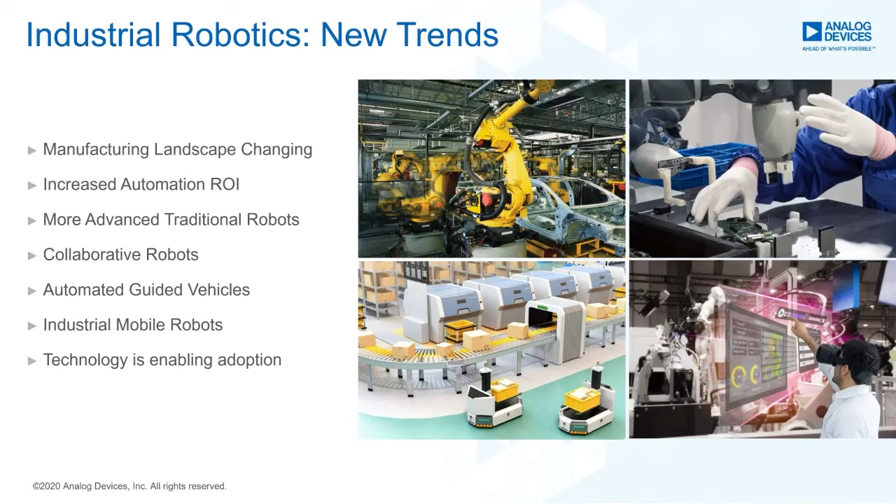Companies can get their hands on automation that they couldn't get before. Now, technology is also enabling the adoption of robots. Technology is allowing robots to operate in new applications and new use cases, places they couldn't operate in the past. Because of this, it's leading to very high growth in this space.

But with this growth and this success comes challenges. And these challenges are both in the form of technical challenges and social challenges.

Collaboration and technology is shifting the limits of automation essentially. Automation is appearing now in new environments, new types of use cases that we haven't seen before. These environments where there are humans, this is increasing a focus on human safety, of course. And this increased focus on safety requires heightened sensing, more technology for sensing. And this is a challenge.

Digitalization is another challenge. Industry 4.0 is all about connecting the real-life factory to the digital world. But how do you do that? How does the factory owner do this?

Machine health monitoring provides an opportunity to provide productivity gains by extracting information from legacy equipment, new equipment, or robots. But how do you make the right measurements? How do you turn these measurements into actionable insights and extract useful data? And how do you combine this with machine learning and extract value from big data?

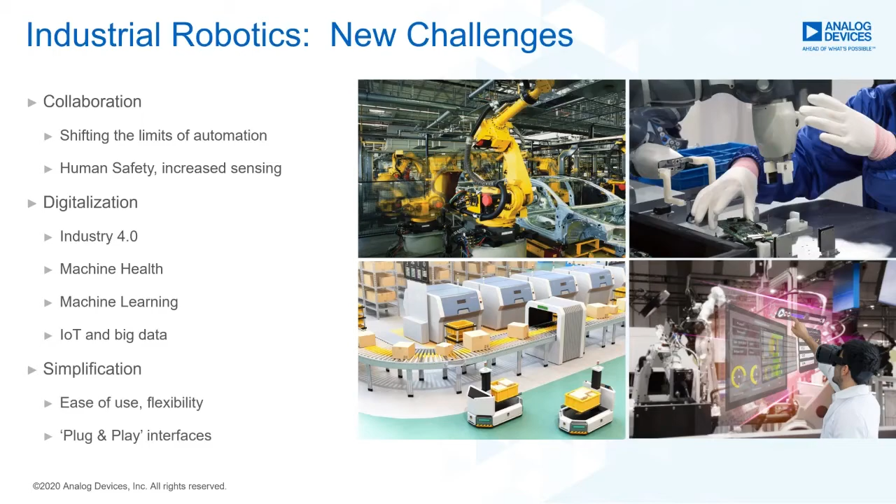Simplification is another challenge for robot makers. Simplification can be in the form of ease of use, such as the installation of the robot that I mentioned earlier, and also flexibility in terms of quick tool changes.

So plug and play interfaces are critical on grippers and end effectors so that the user can quickly change a tool with no special programming required or no special workmanship required. They can just quickly snap on and snap off those tools. So seamless plug and play interfaces that the robot maker must enable and provide. These are key to simplification.

Now, simplification is very important because this enables the adoption of robots for small to medium enterprises, as I described earlier, because they can program these and deploy them quite quickly and get a quick payback on them.

But simplification is also very important to large global organizations. As I mentioned earlier, there is probably going to be a shift towards moving manufacturing facilities onshore. So the idea of this large, mega fixed factory in one place, that's probably going to become less and less common, and we will see more modular factories appearing.

So smaller factories closer to the source of consumption. And simplification feeds in here because if you think about a global dispersal of your operations and your facilities, then standardization and simplification in the form of standardization and consistency will be key to that.

Now, thinking about the workforce, there are real fears out there about robots and automation taking jobs. But the reality is not as stark as the headlines make out. Manufacturers have to do more with less. And the reality is that it's tasks that are going to be automated more so than entire jobs.

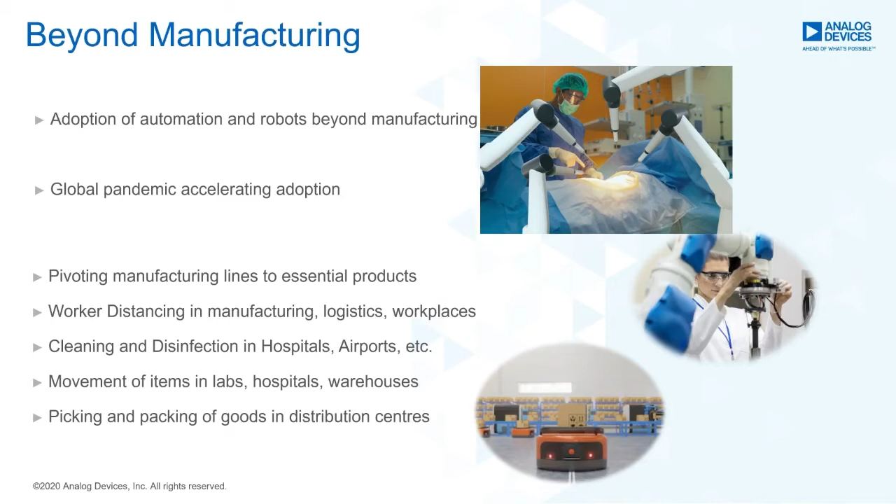Industries like hospitals, hotels, retail, logistics centres, for example. And prior to the COVID-19 pandemic, there was a consistent rate of adoption of robotics. There was a high growth rate in collaborative robots and service robots or mobile robots. These would be the type of robots used in these kind of environments, like hospitals or labs or hotels or logistics centres. So there was a very healthy rate of adoption, but the pandemic now is seeing an acceleration of that adoption.

And the reason for this is that people and business owners want to diminish human contact. They want to reduce that. They also need to supplement the missing workforce - people who are either missing because they're ill, or because they have to go into quarantine, because their government has instituted a lockdown.

So these types of establishments or facilities have to do more with less. And they have to do even more in the face of a greater demand. If you take a hospital, there's more demands on them right now. Laboratories have higher demands. Logistics centres, like distribution centres, have higher demands, as e-commerce has had an explosive growth as people turn more to online shopping and away from going out into the stores.

So I'll take you through a few examples of how robots are helping in this situation with COVID-19. But as I do that, you might begin to see that people might turn away from fearing robots and actually start to welcome them, thinking that they may almost come to the rescue, because I believe that robots can be an aid to economic recovery.

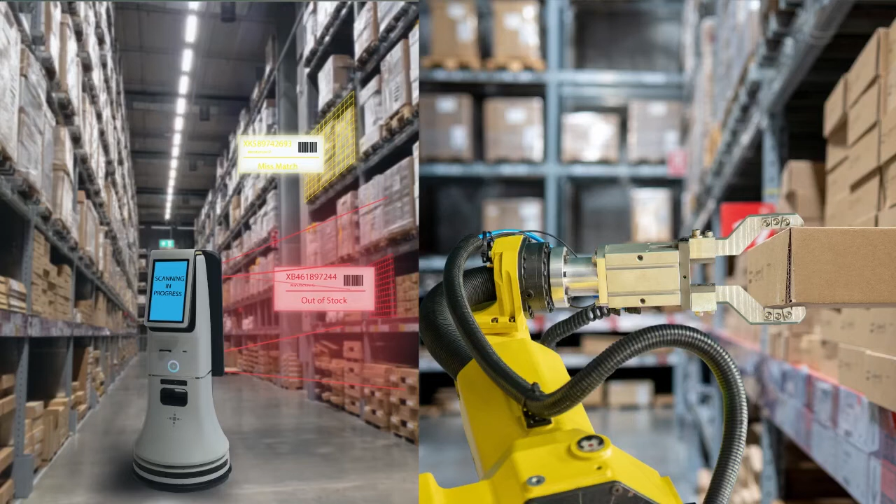And the final example is picking and placing, or picking and sorting of items. If you think of logistics and distribution warehouses and e-commerce, this has been an area of high growth, but there's an explosion of this at the moment as people don't go out to the shops. Many more people are buying online.

So there's an even greater burden on the companies that run these distribution centres, and they're also potentially facing a missing workforce as well. So robots that can both transport the materials around, but also pick through - as I said, artificial intelligence can help them identify objects and pack those goods. This is really helping at the moment in the pandemic.

And to be honest with you, there could be perpetual change here as consumer buying patterns change. Some people will probably go back to their old ways of going to the stores. Other people may stick with online shopping, or continue to online shop for much more of their business. So there's likely to be perpetual change here.

Prior to the COVID-19 pandemic, there was already an upsurge in the number of new startups and companies developing collaborative robots or mobile robots, either the hardware, software, or artificial intelligence. But as a result of this pandemic, as we're seeing growth in some of the areas I just took you through, I'm now starting to see some of the traditional robotic OEM makers, the companies that make the large industrial robots, looking to these new markets and thinking about developing new kinds of robots they may not have made in the past, extending their robot product lines.

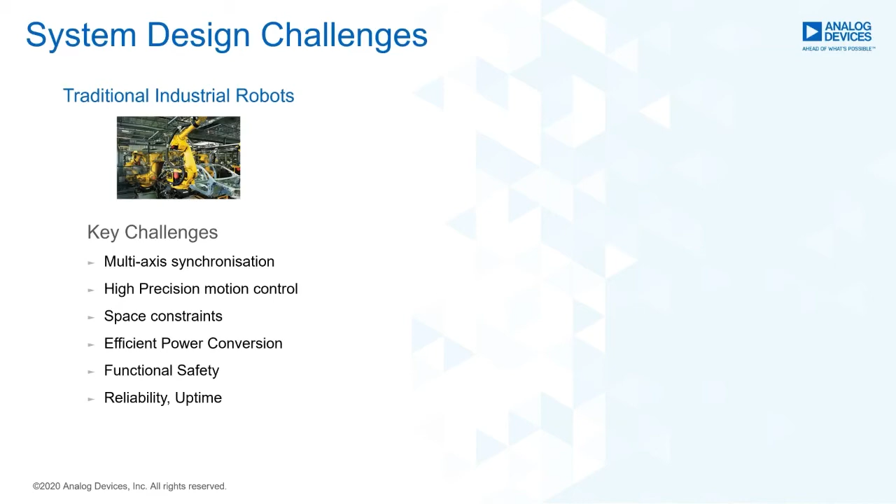In traditional industrial robots, multi-axis synchronization and high precision motion control are critical. Think about the quality of your cell phone when it's being assembled, all those different components being put together and finished, or the quality of the welds that hold your car together, or the surface finish on something very smooth. All of this is done with traditional industrial robots, and things like precision motion, force sensing, and pressure sensing are very important considerations and challenges for robot makers.

Collaborative robots work alongside humans. The reality is that actual instances of robots collaborating with a human on the same workpiece are not as great in number as instances of cooperation between robots and humans, where they're working side by side and maybe passing the workpiece between them. That's far more common. So there are varying degrees of collaboration or cooperation, but nevertheless human safety is paramount, and that's another common trait with challenges in traditional robots.

As I said earlier, mobile robots roaming around logistics centers, hospitals, or factories require human safety to be critical, to ensure they don't crash into human beings. Another design challenge is motion control within collaborative robots, or cobots. In traditional industrial robots, there's a very high level of precise motion control required, but in collaborative robots, you don't need such a high level of precision.

A medium resolution solution is what's required, as these robots work on different types of tasks than traditional robots, and they're also not operating at very high speed like traditional robots. But the challenge, which might sound easier for robot makers, is actually in finding a cost-effective medium resolution position feedback solution.

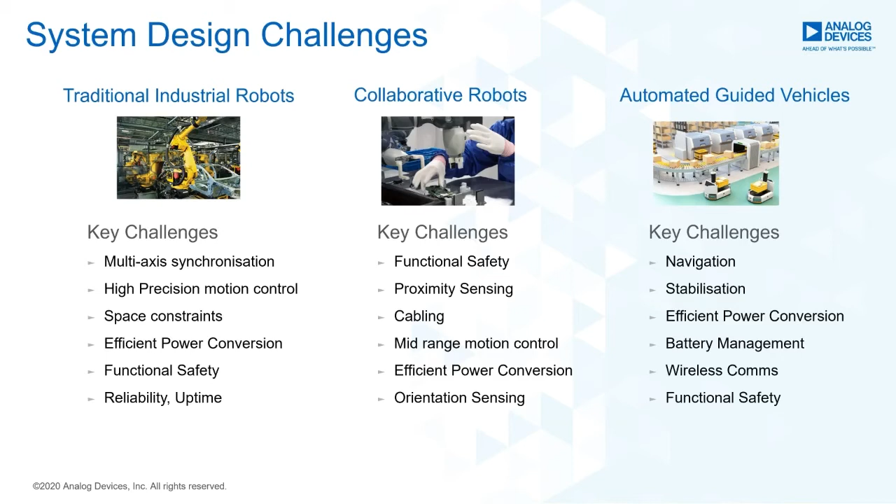For mobile robots, navigation and stabilization, because they're moving around, are key challenges as well. So these are just a few examples of the challenges that robot makers are facing.

You may be wondering how ADI is helping in the face of these challenges. We're seeing that robots are becoming increasingly connected, collaborative, productive, and flexible. This demands advancements across many areas of technology - sensing, precision measurement, safety, navigation and stabilization, orientation, power and size efficiencies, machine reliability, communications, and even cybersecurity. These are all areas where ADI has solutions.

If we look at the subsystems within a robot, some of the sub-elements of a robot, I can give you a few examples.

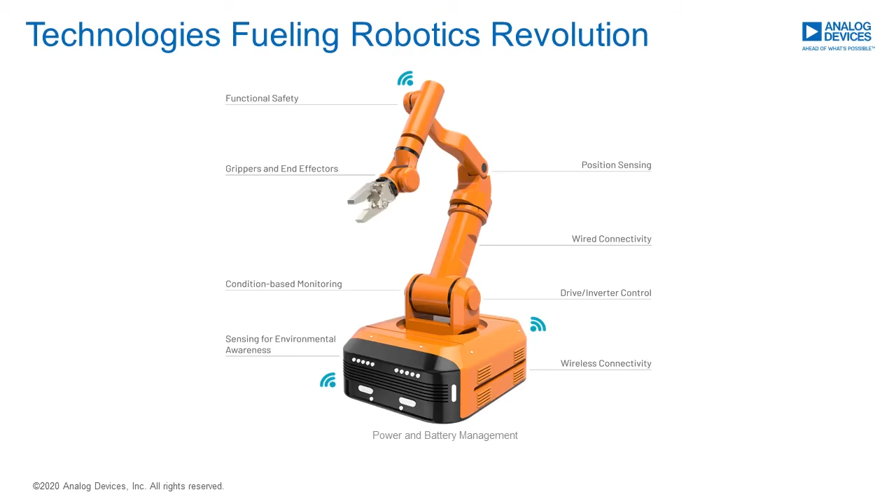If we take the drive control or the inverter - in the case of a mobile robot it could be an inverter, or it could be a servo drive with position feedback in a collaborative robot or a traditional industrial robot. Here, very high precision current and voltage sensing within the motor control are key to getting very precise torque control. As I've mentioned, multi-axis synchronization is key here, and both our data conversion and our communication solutions come to bear.

Position feedback or encoders that I mentioned earlier is another subsystem. Here, Analog Devices has a whole range of solutions in simultaneous sampling, successive approximation analog-to-digital converters, and also isolated transceivers that we can bring to bear on high precision and medium resolution encoder solutions, as well as magnetic sensing solutions.

The area of connectivity within and around robots - wired connectivity could be anywhere from RS485 serial type interfaces to full Ethernet, and EtherCAT is actually quite popular in robot architectures. Analog Devices has a wide portfolio of isolated and non-isolated transceivers with multiple different protocols.

We also have a new portfolio and a new brand called ADI Chronous, which encompasses our industrial Ethernet solutions. We have industrial Ethernet platforms, industrial Ethernet switches which are multi-protocol, and industrial Ethernet PHYs at 100 megabit and gigabit speeds. These are all across multiple protocols, and they're also enabled for TSN, so they're compatible with legacy networks and also future-proofed for convergence on the factory floor.

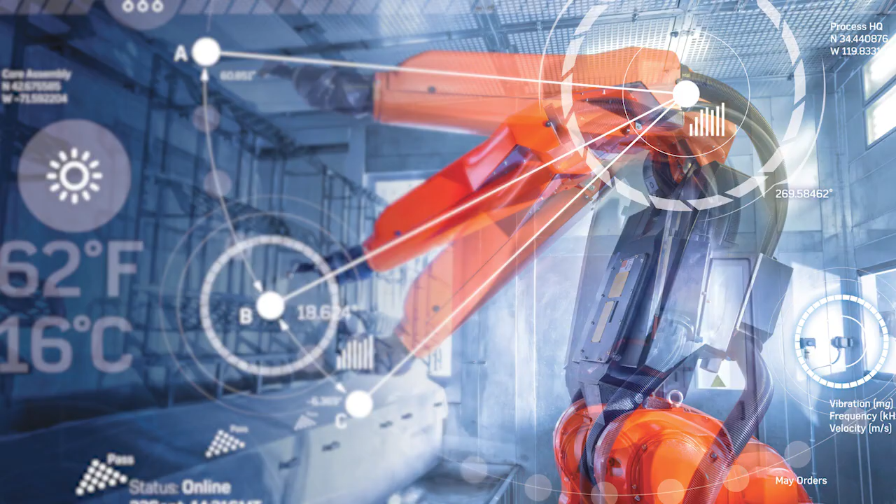Thank you for listening. I hope that you found this talk useful, and if nothing else, I hope that it might have given you a slightly brighter outlook.